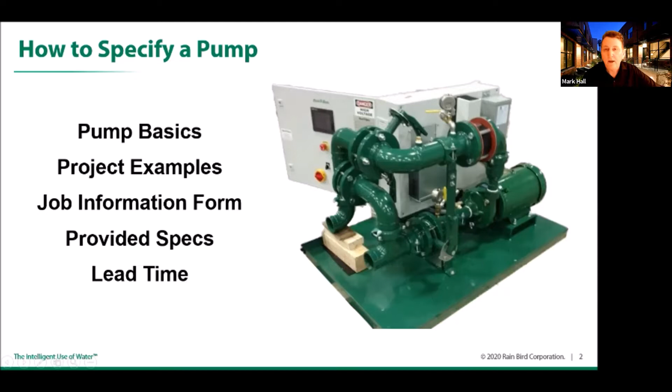So the things we're going to go over: how to specify a pump, pump basics, some different project examples, also our JIF form, or job information form. That's really the main thing we need to get you the pump specs. And then the specs that we actually provide, and then what the lead time is. So we'll go through that.

Now, on pump basics, and how does it work? Well, not everybody knows the pump components, and they don't really know how it works. So what we do many times is a pump tour, where we come to your office and bring a pump with us. But between COVID and everything else, Mike's nice enough to, I'm going to stop my share here and give it to him. And hopefully he's got a pump somewhere at his house that we can look at.

Yeah, absolutely. So, Mark, keep chatting. Give me 30 seconds. Let me walk down and go to the pump. I'll join you guys soon. That sounds good. We'll give you 25. Okay. He's been really good. I've had to turn him into like an actor. We did one just, we tried to do a video, and it actually came out really well. But like anything, those kind of things you've got to do a bunch of times to get them right. So you got the actor and film crew all in one there, huh? Yes. So anyway, he's been great, open to do this.

We've only done one of these before, and literally they said, we're going to go spec a pump. That doesn't usually happen. But it's still good to have the information. A lot of times you don't have this overall. You guys are so busy doing what you're doing. This will at least give you something. And then, like I said, when it comes to specing pumps, you just fill out a form, and if you have any questions, we're good to go.

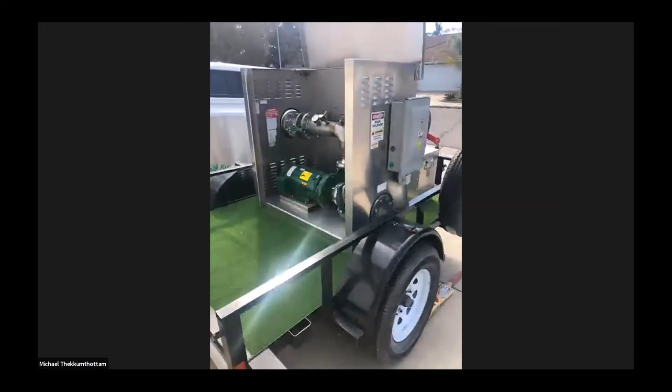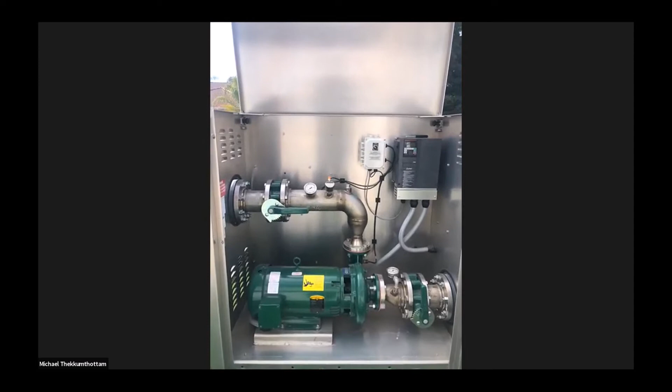So here it is. What you see right now is our CLP pump station, which is one of our super value engineered models. This one doesn't have all the bells and whistles, but this is the smallest pump station Rain Bird makes, which we could actually haul to the customer to demo and show the components. So I'm just going to go through the basic components; typically all the pump station components are the same.

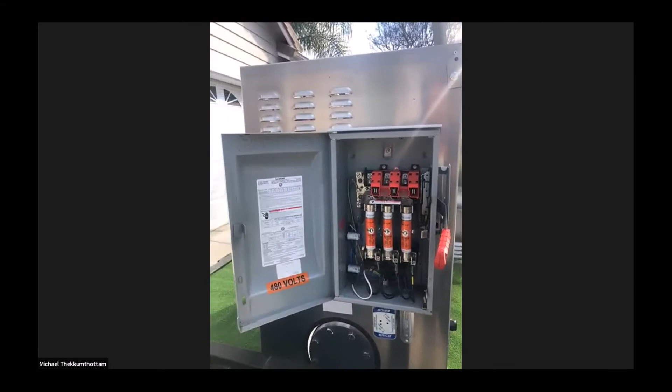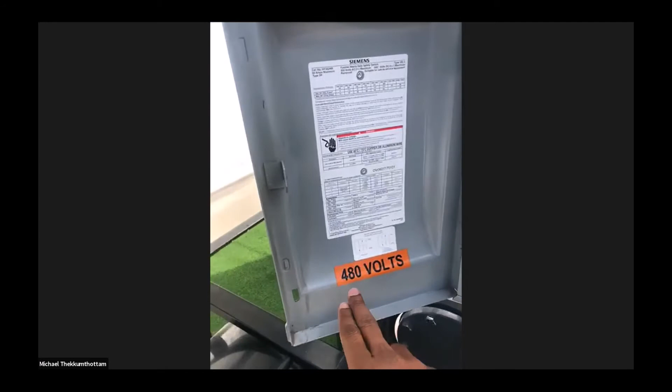So one of the most important components is the disconnect switch, where the main power comes in. Like you see, there are all the fuses here. It could be single phase or three phase. Currently this one was designed for 480 volt. In the next couple of slides of the presentation, you'll see the most important parameters we need to design a pump. Power is one of the main components we need to identify before we specify a pump. So this is the disconnect switch where the incoming power comes in at the site.

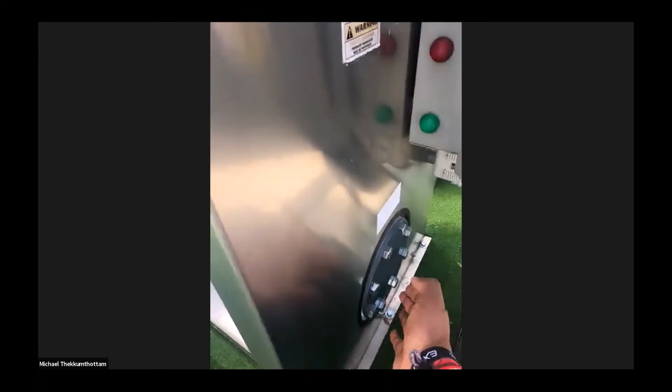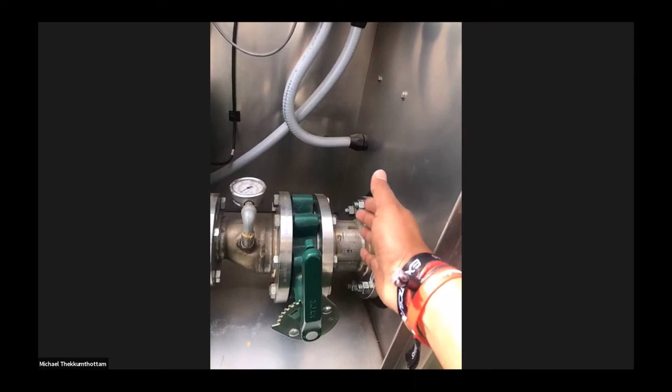Moving along, we have the inlet, which is flanged out here. This is the inlet of the pump where the actual water comes in. So it will be the water meter, then the backflow, then the pump station. After the backflow, the piping will come into the inlet of the pump. We do have an isolation valve for the inlet, as well as the discharge. The reason we have the isolation valves is to isolate the pump at a later time if some maintenance needs to be done on the pump itself. So you can isolate the system, take this pump out and do the repair.

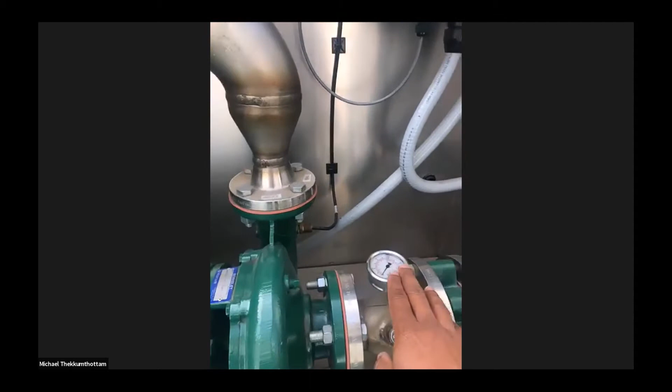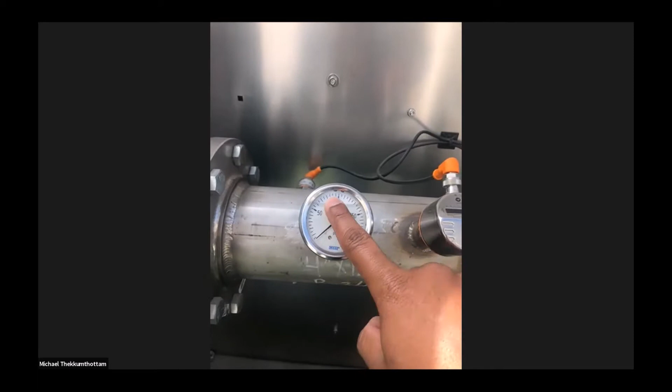The next component we see is the inlet pressure gauge. The inlet pressure gauge shows the incoming pressure, the pressure we see after the backflow. One of the most important reasons why we need a pump station is to increase the pressure. For example, if the pressure is 20, the pump boosts the pressure and discharges it. And here we have a discharge pressure gauge. When the pump is boosting, it shows the actual discharge pressure. So that's the inlet pressure gauge, and that's the discharge pressure gauge.

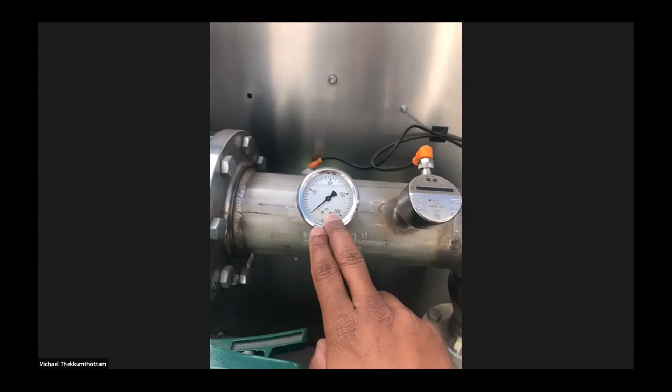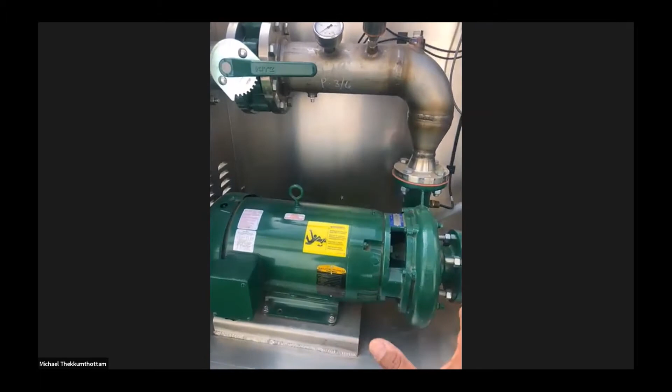Then we come to the most important part, or the heart of the pump station, the actual pump itself. So this green component you see right here, that is the actual pump. So here we have a horizontal end suction centrifugal pump. So it's mounted horizontally. It's actually suctioned from the end. So that's why I called it end suction.

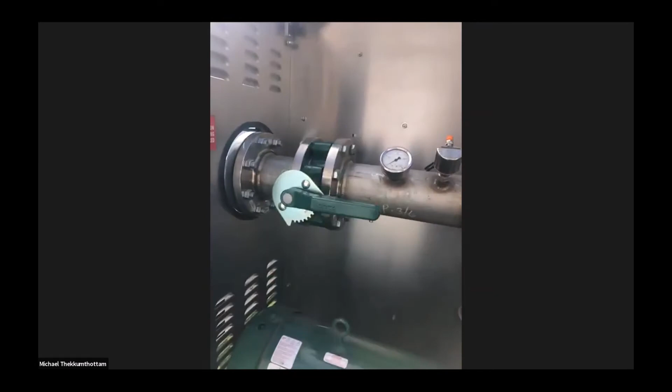And the discharge is going to the outlet. So water comes in, the pump rotates with the help of the motor and boosts the pressure and discharges to the outlet. So as you see, this is all the plumbing you have. You can also see some of the other components here.

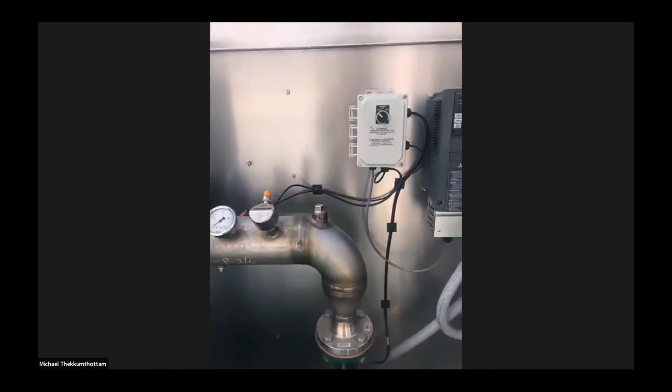So all the pump stations that Rain Bird makes are variable speed operated. So what you see here, this gray box, that's the actual variable frequency drive, or VFD. So the purpose of the VFD is to actually regulate the speed of the pump or the motor to push an accurate amount of water to each zone in the irrigation system.

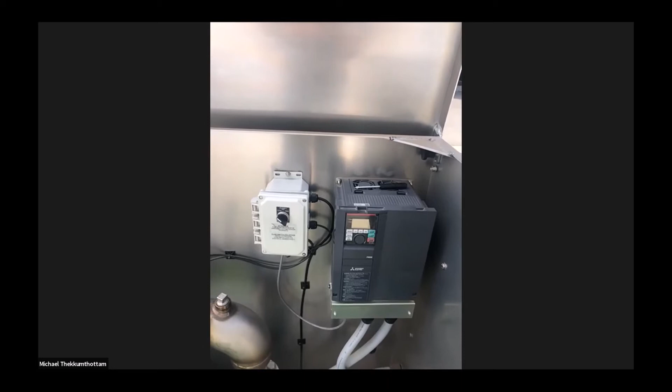When the valves come on, one valve or two valves, depending on the flow rate required for the zone, the VFD actually ramps up the speed of the motor to push more water or less water, and it will also help to keep the discharge pressure constant. That's what we want with the VFD pump. We should always get a constant discharge pressure, which will make the irrigation system work more efficiently.

Does anybody have any questions so far? Hey, Mike, I just wanted to ask, do we test every single pump that we put out? Yes, absolutely. So any pump which Rain Bird manufactures, we actually test it in our facility in Tucson.

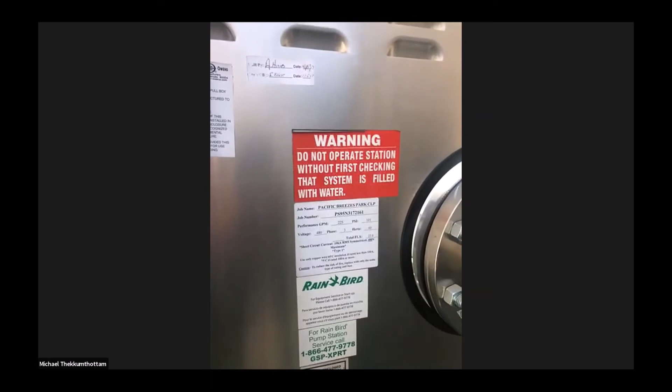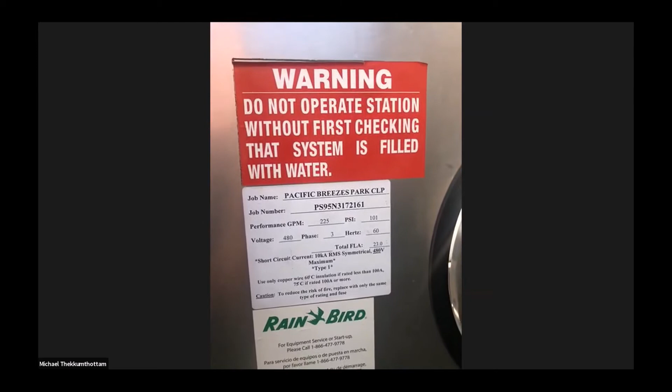So here you see, this is an actual nameplate of the pump station. It will have the job name, the serial number or the job number, and also the performance, like the gallons per minute, the set or design discharge pressure, voltage, and all those details. Also, you can see the Rain Bird pump station service call number. So this is a service which comes along with the purchase of the pump.

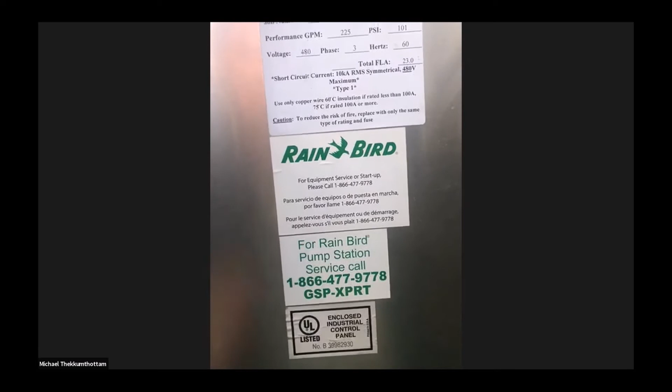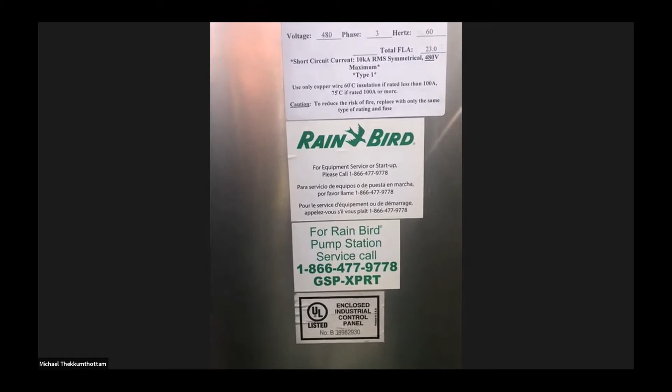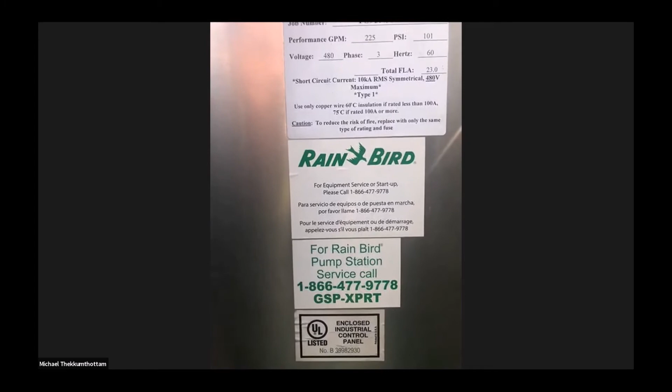It's a free service. It's a remote support line where a customer, if they have some issue with the pump at the site, could actually call this number, and we can remotely try to rectify the issues or any alarms coming on the pump screen. The reason we are confident to give this is because all these pumps are tested and we have all the test data at the factory.

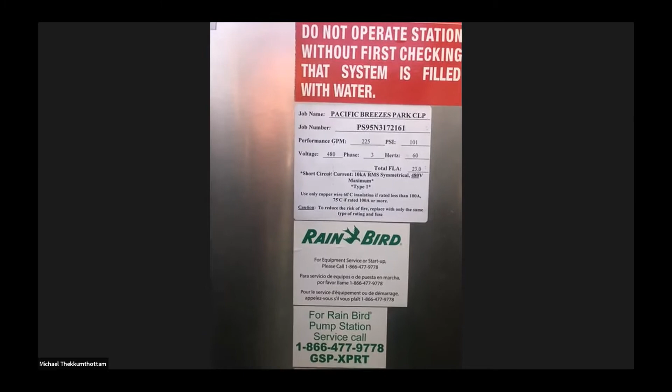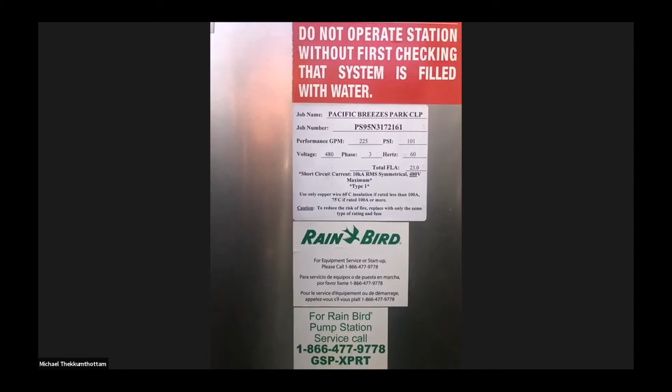So when you call this number and give this serial number, we can pull up all the data, and we know how the pump was tested, at what parameters, how it's supposed to work, and we'll be able to help the customer adjust some parameters and make it work for the system. Awesome.

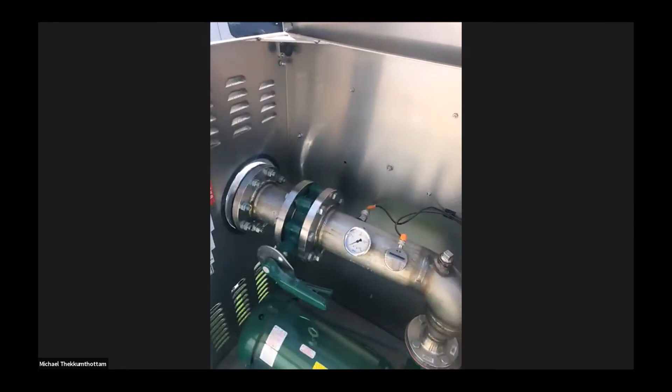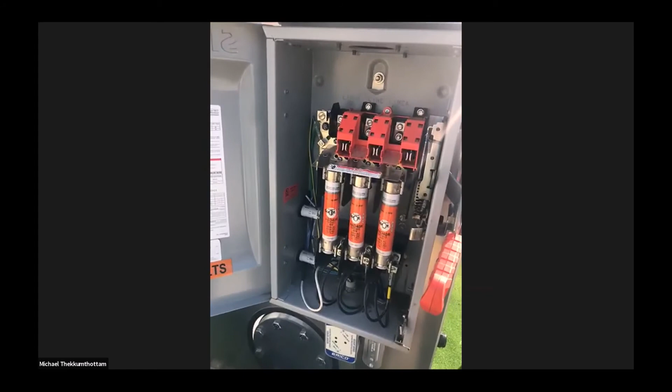Another main component. Go ahead. I have a little question. You said it could be either one phase or three phase on electricity. What's the difference between that? If you could explain the basics. Yeah, absolutely. So I'm going back to the actual disconnect switch. You see, this is actually equipped for three phase, but it's the power supply which is being allotted to the specific site.

So if it's single phase power, you will only have two lines coming in. Basically, single phase power takes more amperes or more electricity to operate a pump station compared to three phase power. Does that make it easier? Okay, so it just kind of depends on the power allotment that they get approved for from the city. Correct. Yes. So we can manufacture pump stations suitable for any phase, single phase or three phase.

When you are designing a system, you may not know because the project has not even started, right? Right. So how we do it is we recommend the architect assume a standard voltage and phase. For example, it's hardly seen, 480 volts; it's higher voltage. Mostly what we see is 230 volts or 208 volts. So we could put a 230 volt single phase. That's the most common on city developments or housing developments and stuff like that.

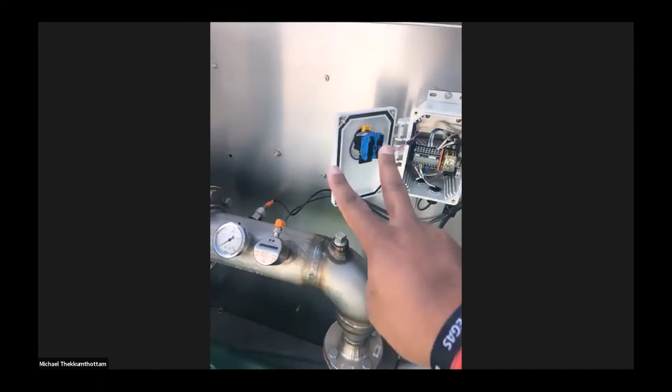Yeah, good question. And also, I think, Mike, the biggest thing, right, is if anybody can get three phase, it's just much more efficient. Correct. And the electrical costs go down. Yeah. So, when we go through the slides, I will explain it a little bit more, Brandon. And then I have one or two more components I just need to cover while we are here.

So there are a couple of ways we can start a pump station at a site. Does anybody have any thoughts on that? By flow sensing. Yep. Awesome. Any other? Pump start relay, maybe. Yeah. Okay. I know you know that part. Okay. So here is what you see.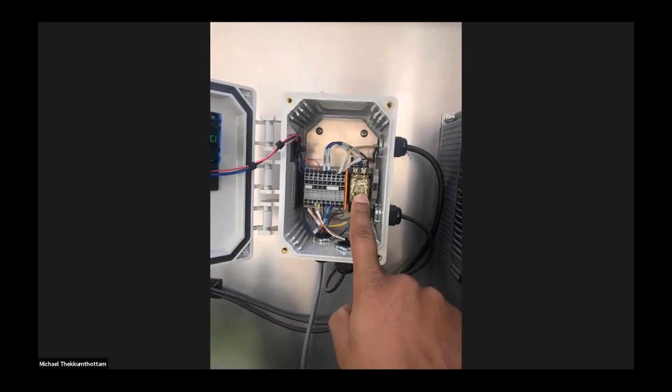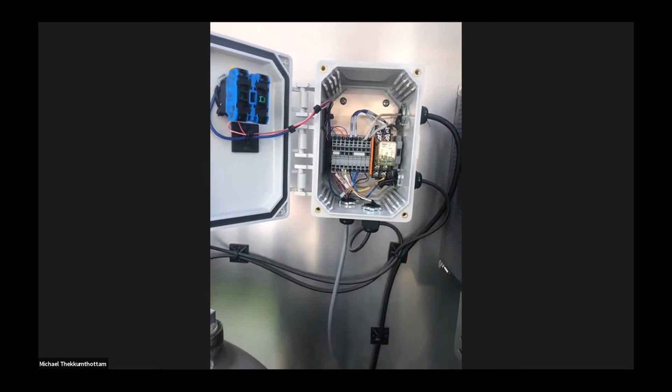So the CLP pump stations come with two options. One is the pump start relay. So this is the actual pump start relay, which you see here. So how it's connected is the irrigation controller, from the 24 volt signal, is actually connected to the pump start relay. So whenever the irrigation turns on, and if that zone needs a pump, the irrigation controller will send a signal to this pump start relay and tells the pump and the VFD to turn on.

So just to give you an idea what a pump start relay is, this is an actual pump start relay. It could be a bigger panel in our bigger platform, but the actual relay looks like this. Wow. So how does it determine whether or not it's going to need to turn on? Is that additional programming that needs to be done at the controller to state the amount of pressure needed, or does it sense that depending on the zone that's turned on?

So it depends. It's actually programming on the controller. Okay. So certain controllers, I mean, I don't think Rain Bird has that capability yet. We are coming up with options. I think that on the newer IVMs we can pick and choose which stations need the pump to turn on. So from the irrigation controller, it will send a signal to the pump start relay to turn on the pump for that station.

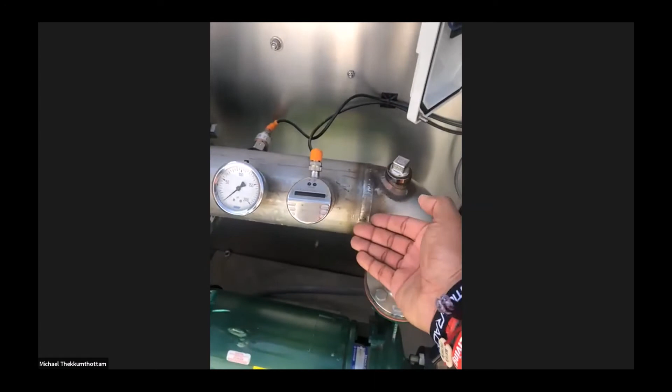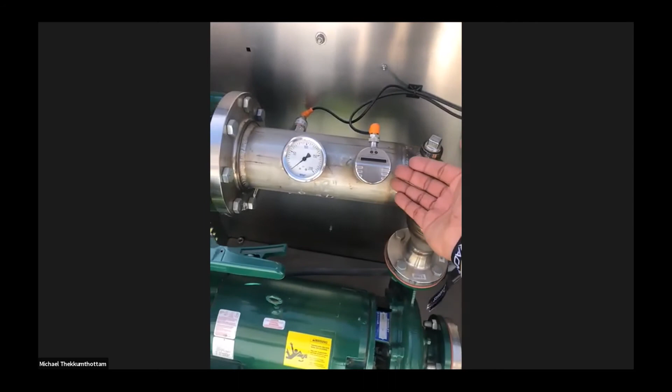Okay. The other, typically, what we do is a flow switch or a pressure start. So this CLP pump station has a flow switch or flow start kit option. So this is a flow sensor. What it does is when there is a flow through this pipe, this sensor senses the flow and tells the pump station and the VFD to turn on and start boosting. So basically, when the irrigation turns on, it actually senses the flow through the station. So that's a flow start.

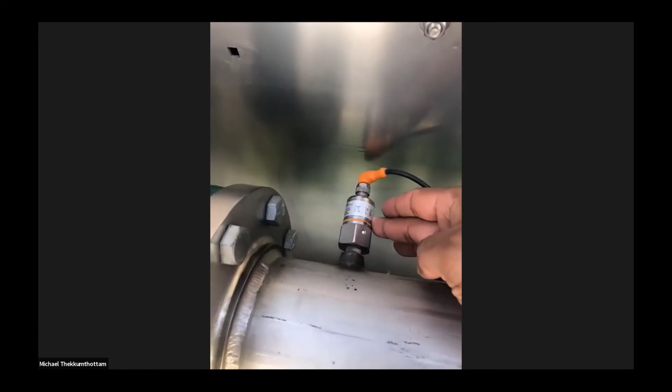There is another option also, which is called a pressure start. So it's similar to a flow start. Basically, instead of flow sensing, it senses the pressure. So here we have a pressure transducer, and it senses the discharge pressure. So when irrigation turns on, the mainline pressure goes low. The sensor senses it and tells the pump, hey, my pressure is going down, I need some boost, start the pump. So that's what the pressure start option is. Okay, yeah, go ahead.

Question. So since the motor is variable speed, what is it that makes sure that you're not producing too much pressure? Like, depending on the zone, if it's a zone that needs, say, 35 or 40, what makes sure that doesn't ramp up to like 50 or 60, or that you're overstressing the motor? Did that make sense, the question?

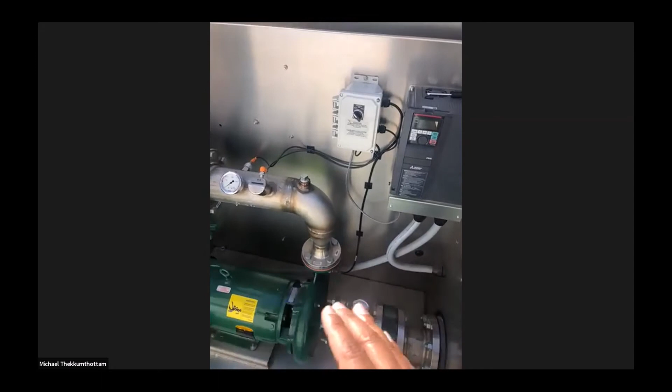So with the VFD pump, the VFD controls the speed and adjusts the flow. But in the VFD, we actually set a discharge pressure. For example, if it's 20 incoming, we set it at 70 or something like that, so that it's adequate pressure for the rotors. Okay, so that's set in the VFD? Correct. So whatever the flow rate is, depending on the zone, the VFD makes sure the pump station delivers the constant 70 psi or whatever the set design pressure is. So that's what the VFD is used for.

How it achieves it is by regulating the speed or RPM of the motor, how fast the pump is turning. So it regulates the flow rate, how much water it's pushing. And also, I think what you meant was, for example, if a system has drip zones and rotor zones, the drip zones may not need that boost pressure, but rotor zones need the boost pressure. Is that what you had in mind? Right. Yeah.

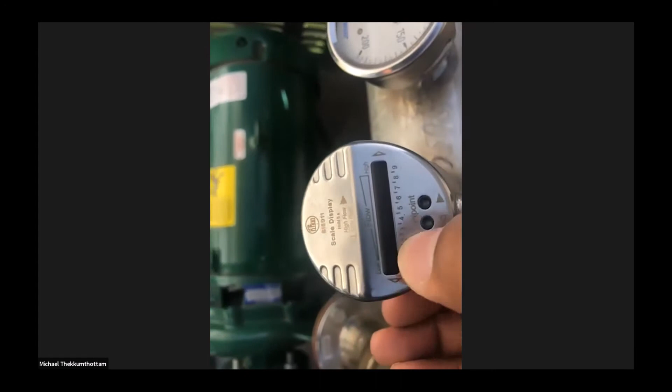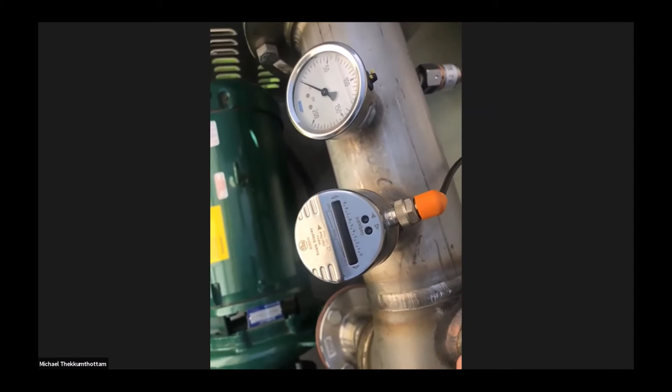Because I was thinking if the pump is set to operate by flow sensing, if a drip zone comes on and starts to flow, is that going to kick it to boost to maximum pressure that's set by the variable speed? It will. So one thing we could do is, I don't know if you can see this, there are some numbers here where you can actually set when the flow should start. Okay. So typically what we do is we know these small zones or the drip zones are low flow. So when we do the startup of the pump, we try to run the smallest zone when they need the pump to come on.

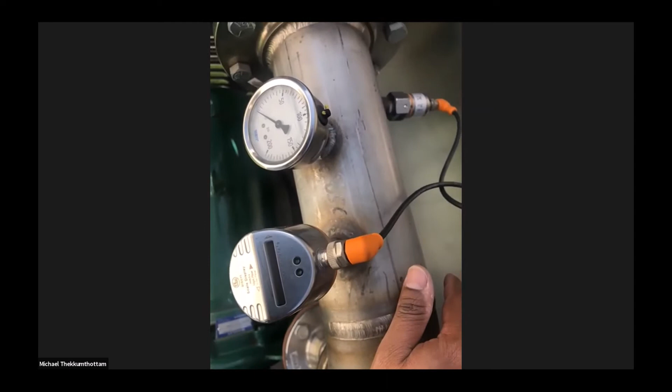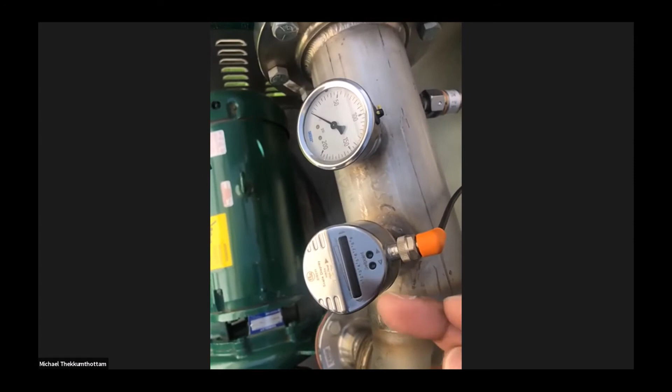For example, only the rotor zones come on. So we will start the smallest rotor zone and set this flow switch to only trigger the pump to come on when it sees that much flow. Okay, that makes sense. So below that flow rate, the pump will not turn on. Only when it hits, for example, 20 GPM or something, that's when the pump starts turning on and then starts boosting the pressure. Until then, they actually work with the available inlet pressure.

Hey, Mike, with drip and rotors, like you guys have been talking about, is it advantageous at all, even with the VFD, to stack, let's say, 4 drip zones together just to get a higher flow, or no? It is. So the other option is we could include pressure regulation at the drip zones, so that we don't overpressurize those zones. Yeah, go ahead, Brandon. Yeah, and that's definitely something we usually, I mean, it's standard for our drip zones, we include a pressure regulator.

Yeah, that's the best way to do it, because the VFD, once it's set at that discharge pressure, will always try to keep the system at that set pressure, and that's the actual goal of the VFD: to regulate the flow and keep that pressure constant. And what Mark mentioned earlier was because, for example, the pump station, we'll cover it in the coming slides also, each pump has a minimum capacity and a maximum capacity, even if we use a VFD.

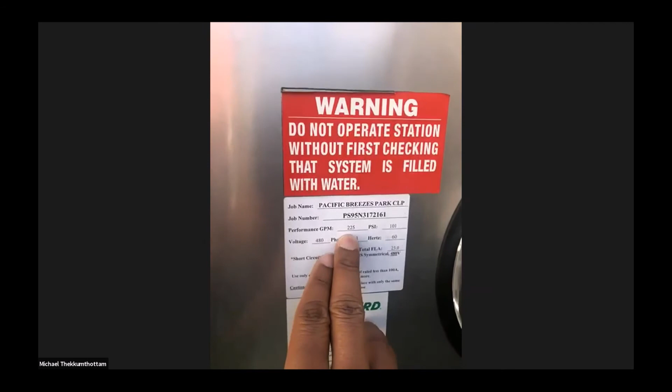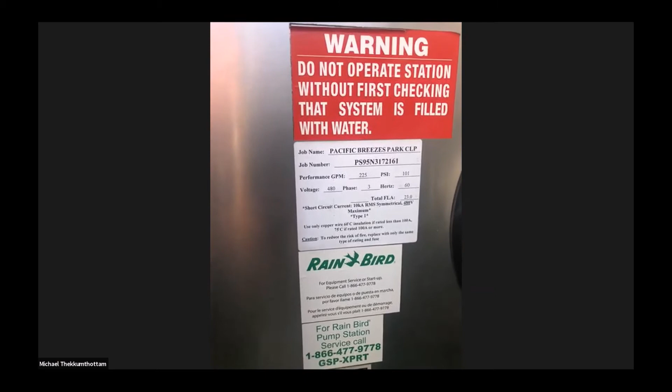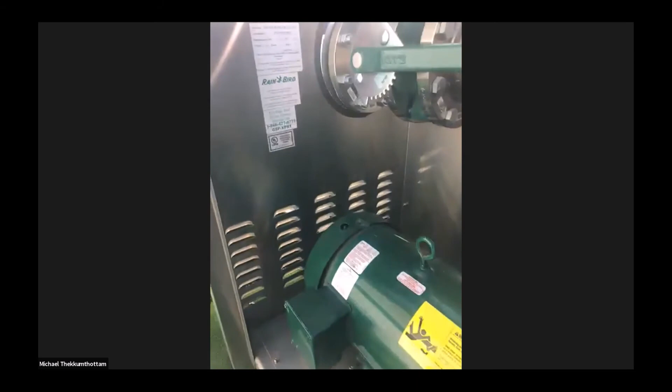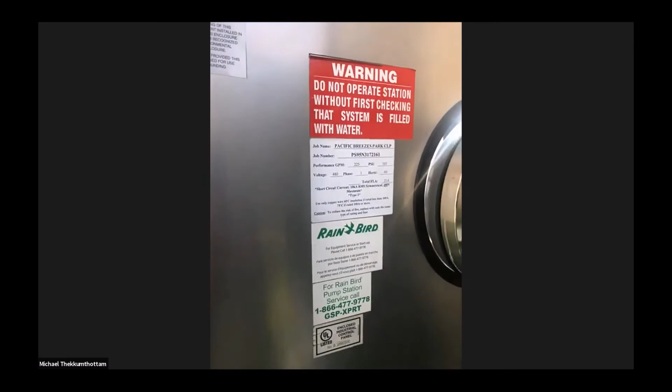For example, this one here is designed for 225 gallons per minute max flow. So that's the maximum flow that pump station can achieve. But the minimum flow will be around 90 gallons per minute because of how the impeller of the pump is. In the casing there is an impeller, and the trim of the impeller determines the maximum capacity of the pump station. Some people think if we have a VFD, the pump could cover from 225 GPM to 5 GPM or something like that, but it's not true. Every pump has a critical speed. We don't recommend operating the pump below the critical speed, half of the maximum RPM.

So that's why Mark was saying, in sites where there are smaller drip zones and larger rotor zones, if we need to make the pump work efficiently, the best thing is to stack the stations and bring that minimum flow higher so that the pump will not trip and not give any alarms. Otherwise, when the pump is running below its capable low flow, the pump thinks it's not getting enough water, and it shuts off. It's a safety alarm so that the pump or the motor doesn't run off and burn down. So that's a low flow alarm. It'll kick on.

Very good. Okay. You want to move on to the slides? Okay, I'll join you guys in 30 seconds. Yes. All right. See you.

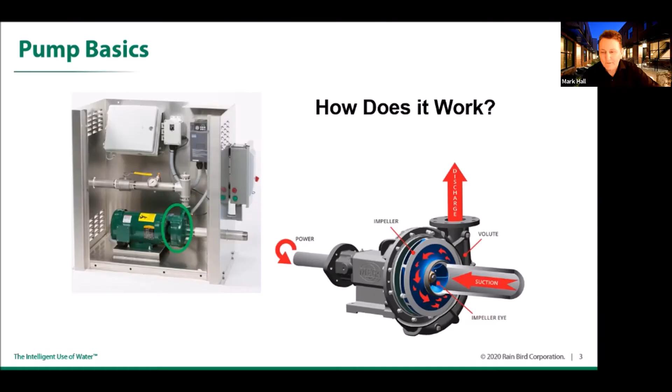All right, we'll probably move through these fairly quickly, but it's really helpful, at least for me, when Mike walks through the actual pump, because so many times we're just looking at the specs and not at all the nitty gritty. Yeah, I really enjoyed that. You get to see all the different angles instead of just what the cameraman took and what pictures are on the internet. Yeah, exactly. This will be good though, a good follow-up. You guys can see that okay?

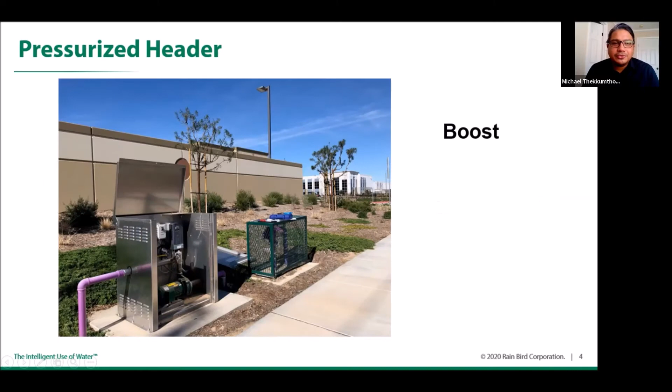So the above ground tank, Mike will go into that. We've got several different conditions. Most of your jobs will be standard, but every now and then there may be some different types, and this is one of them. Yeah, so what we are seeing right now is different types of application. The first slide which we saw is basically the boost application, where city pressure is coming in, and after the backflow, we are putting a booster pump to boost the pressure for the irrigation system.

The next slide, I've seen a lot of this kind of system. It's an air gap tank system, or we call it a flood suction, because we store the water in that tank and pull the water from the tank for the irrigation. So the pressure available will be approximately 2 psi inlet, and for the irrigation, typically it will need approximately 70 or 80, depending on the site, if there is so much elevation.

I've seen a lot of this in the San Jose area. Even if their city water has enough pressure, they actually use this air gap tank. And I've been trying to tell the city that that's actually not a super efficient way, because if you already have approximately 40 psi, when you push that water into a tank, you're dropping it down to 2 psi or 5 psi, and then we have to again use a bigger pump to boost that pressure back up.

So instead of doing an air gap tank in those areas, they could basically put in a backflow and then connect it to the booster pump right after that. But it's just their way of doing stuff, so we don't have much say yet. Yeah, that's interesting, because that whole tank would cost a lot more than just a backflow and connecting it to the pump. Yeah, that's right. Sorry, this is Janet. I'm sorry I was late, but we get a lot of that in different cities where they want these air gap tanks, and it's such a waste of money to me, because really, you could do the same thing with a backflow preventer, way cheaper.

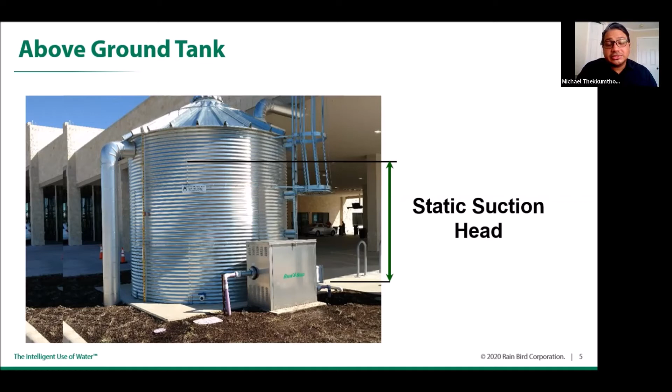Have you guys seen a lot of rainwater harvesting systems up there? Yeah, actually, San Francisco now has, I think, a mandate where any new buildings have to have rainwater catchment. Awesome. Yeah, Rain Bird has a system, and I've seen it a lot in the LA area. We get lots of requests, and Mark and I can share a typical system, but mostly the maximum flow for that system is designed around 25 gallons per minute. Oh yeah, we do drip mostly. Exactly. And we'll have a mini self-cleaning filter system in there, because it's harvested rainwater, so we want to make sure the drip line is protected. It's a mini incorporated package system, which is pretty value engineered as well. Yeah, I'd love to see the literature on that.

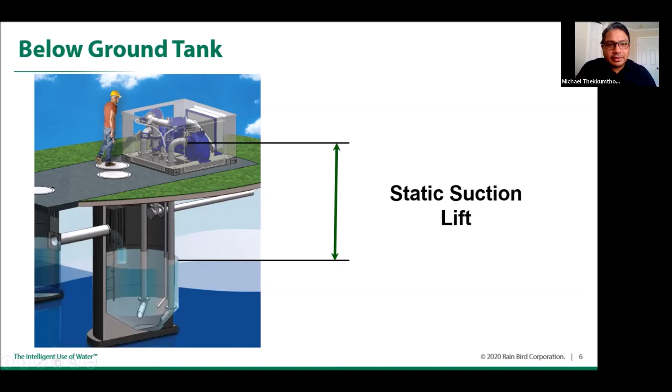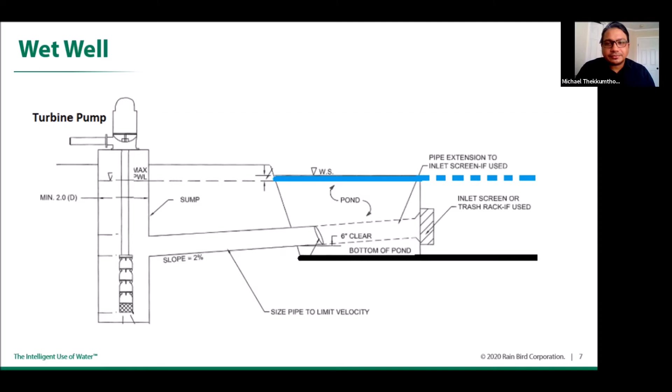What we're talking about is like 1,000 gallons per minute, 1,500 gallons per minute. And lots of times golf courses also use these kinds of systems. And these are a couple of $100,000 worth pump stations. So we have the capacity to do that too. To do 5 of those? Every year.

We've run into it a couple times, but not very often in our landscaping. We did, I think, a cemetery once that had a lake. Awesome. Yeah, Jen, in 2019, we did the Riverside National Cemetery, the newer phase 5. And now we're working with the cemetery to upgrade 2 of the older sites, which had older pump stations. So we're proposing a new pump station.

We're working with a design engineering company up north called VTI. They're the ones designing the retrofit, and we are supporting them with the pump station. So please keep us in mind if you have opportunities like that. We'll definitely be able to help you out.

Moving on, another scenario which we see is also a suction lift type station. We've done a couple of these in Northern California, Auburn area, where there was a regional park. They used to have a wet well type system, but it was 30 years old, and the park district didn't have money to build a new wet well system. So we proposed a suction lift, where a pump can stay on the bank of the lake, and we are pulling the water from the lake and using it for irrigation.

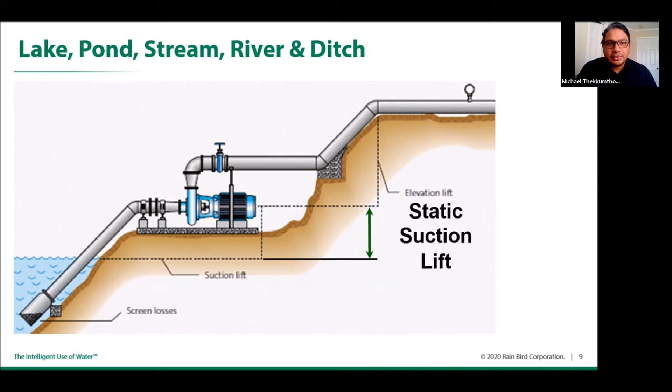They used intake screens to filter the water coming from the pond to the pump. And we also used a secondary filter downstream of the pump to clean the water before it's pushed to the irrigation main line. All right, Mike, if you let me, I'll cover the flow range. How's that? Okay.

I think we've already talked about this a little bit when Mike was going through the actual pump, but things to keep in mind. These are items that we ask on our job information form, and they're critical to sizing the pump correctly. So we've got to know the minimum flow. So if you've got drip zones, maybe you're going to stack those where you're doing 2 or 3 or 4 drip zones at a time.

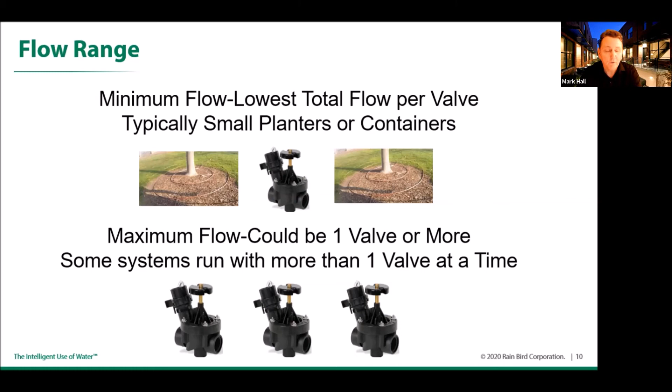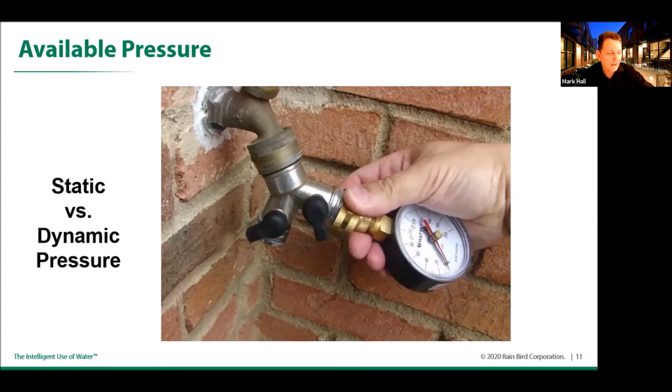Then we also need to know the maximum flow when you've got all those rotors going, or whatever the combination is, but we need to have that parameter. Otherwise we can't size it correctly. So the flow range is super important. Mike's also going to talk a little bit about the available pressure. We all know a lot of the basics. So static versus dynamic pressure.

Yeah, so static pressure is the pressure available when there's no water moving. The dynamic pressure is the pressure when the water is moving in the irrigation system. Dynamic pressure will always be lower than static pressure because in dynamic pressure we are considering the elevation losses, the bends, the friction losses through the pipes and all this stuff.

So when you are designing a system, it's hard to know the dynamic pressure, but the way we figure it out is using the critical loss calculations, which you do. On that, you list out the backflow losses, elevation losses, friction losses and stuff like that. Yeah, the last 2 months we've been going through that pretty hardcore here, making sure we know how to do those and hammering that into their head. It's really important. And one thing we need is to know how much pressure we need to boost.

Dynamic pressure is mostly important when we are retrofitting a system, an older pump station, or a site where they didn't have a pump and now they would like one. Typically school districts, which may not have needed a pump 15 years ago, but now the pressure has gone down, so now they need a pump.

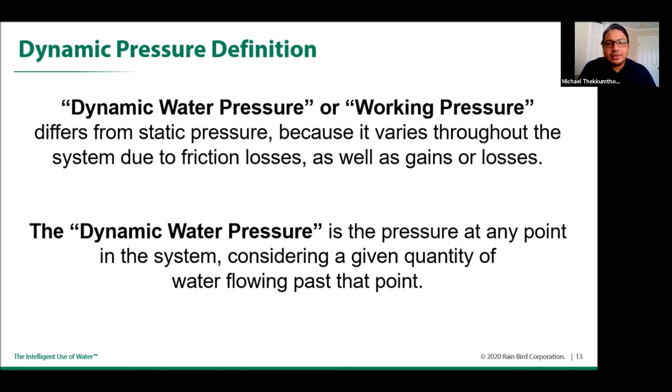So I go to a site and check the static pressure after the backflow when there's no irrigation running, then check the dynamic pressure when the irrigation is running. You'll definitely see it go down at least 5 to 10 psi. Quite a bit. All right.

Yeah, so typically if we supply pump stations for military sites or Air Force sites, they have their own camouflage color or different custom paints they want. So they would request special painting. We did the Riverside National Cemetery pump station. It's a completely purple pump station, standing in the middle of a beautiful landscape, because it's recycled water they're using. They wanted it. So if the customer wants it, we can customize it whatever way they want. We have the capability. So, Mark, could you please go back again?

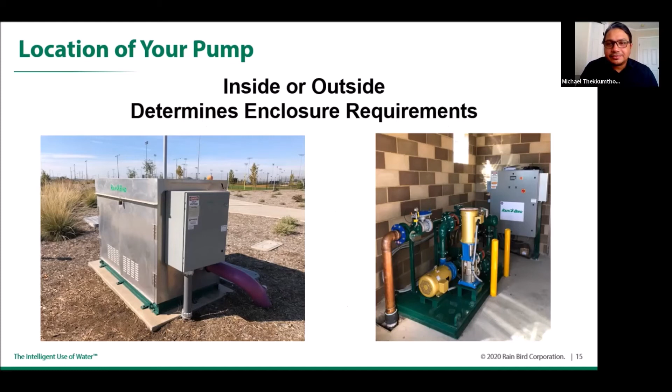We could recommend to the customer, hey, this is 7.5 horsepower or 10 horsepower and above. If possible, we can go with a higher voltage, like 480 volt or 460 volt, or a three-phase power supply, so that their operational cost through the coming years is less compared to using single phase. What is the standard range of horsepower for the pumps you guys produce?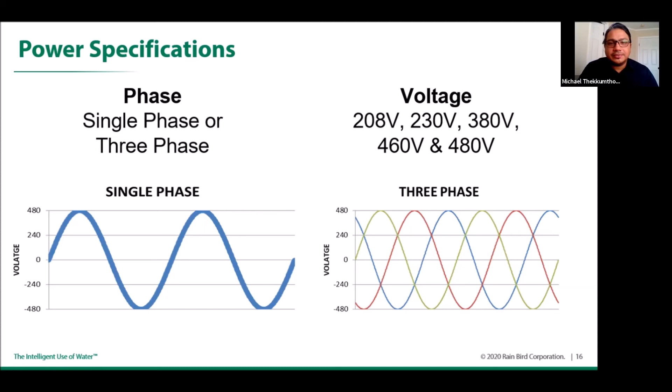Yeah. So the lake pumps, which we saw earlier, are about 100 horsepower, those are massive. Those ones are 460 volt or 480 volt three-phase, because we want to reduce the operational cost of the pump station. Yeah, that makes sense.

All right, it looks like a lot of boxes, but this is our job information form, or JIF form. We'll send you guys an Excel spreadsheet. It's actually really simple. It's got these 4 steps and it's just making selections. You send that back to me or to Mike. We work together on that, and then he'll come up with the actual pump spec, the details, everything that you need. And if anything changes along the way over the next few months, which happens all the time, or there's a new higher GPM, he'll make those adjustments. And then we record that.

Now we also have this online. I sort of prefer the Excel spreadsheet myself because then we know what's going on. Online, we do know what's going on, but it is another option where you could literally go on the website, put the numbers in, and they'll put out a quote for you. But I'm sort of old school on that. I'd rather go with Mike and see a person. So that's just me.

Mark, I just wanted to add something really quick. Yes, sir. We've been in the market for so long, and in the market Rain Bird has very expensive pump stations compared to other manufacturers. When I started with Rain Bird 3 years ago, that was the talk in the market. The reason is the job information form which you saw. We would definitely hold hands with you on this, because sometimes some designers just tick every box, and then we basically quote a pump including all those.

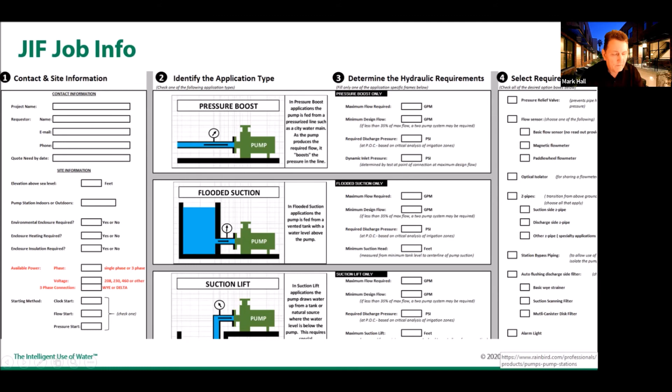So these are the specs that we provide, and the cut sheets for your plans. This is the cut sheet. The pump tech spec is a little bit more standard, but this will have all the other information on there, so you can just put it right on your plan. You don't even need a sticky back, if you know what that is.

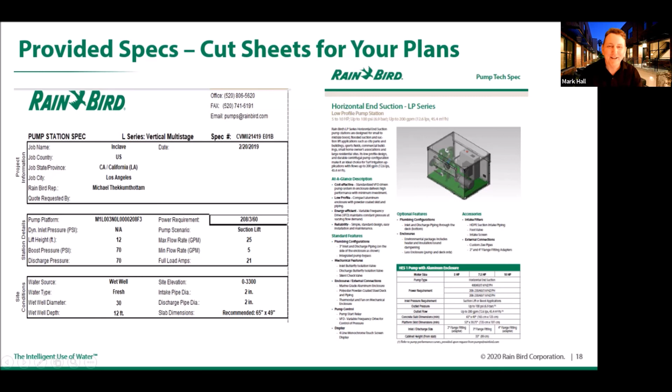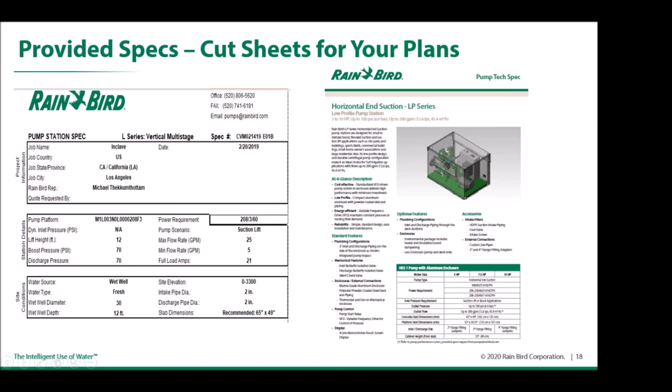Somebody does. I do. I always think of sticky backs when I see these, like cut sheets and stuff. I'm like, yeah, sticky back. No, we just paste them in on CAD now. Yeah. How about that? Thank you. Do you have details too, or never mind.

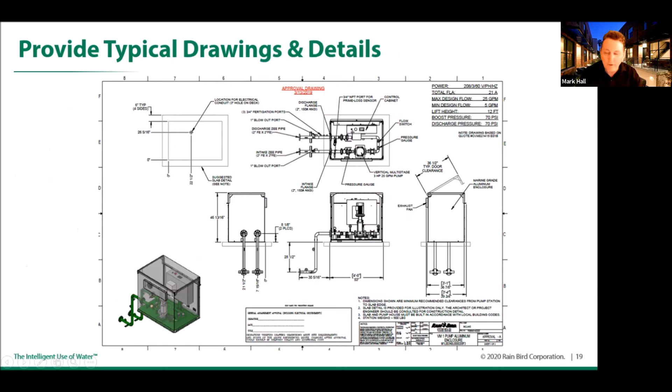Yep. Definitely. These are just some more of the drawings. Mike, I'm going to keep moving only because we're getting on the hour here. So here's the turnaround time, it's really fast. Sometimes it's faster than even what I have on here. Mike, I know he works late at night. Sometimes we both do. Last night, I think we were doing a pump spec until about 10:30 or 11. So it wasn't that it was even a rush. We just want to make sure that we get them done.

So you can see the different platforms. If you do something like a custom platform and a much larger pump, it may take us 72 hours to turn it around. And now at Rain Bird, we have quite a facility for the pumps if you guys haven't seen it. And of course, it's going to be a while before we can have fly-ins again. But it's impressive, and we can get things done very quickly. So 3 to 6 weeks for a small platform, and then 6 to 12 for large.

So I think that's another reason, Mike, when you're talking about the cost. And Janet, I was going to tell you that it's been interesting because just in the couple of years I've been up here with Mike, where we've gone through and done this and talked about job information forms, people have done comparisons. I think they like the fact of us getting back to them with the right information and following through. But I know we have to be competitively priced. So I think we've already turned at least 6, 7 firms to 100% Rain Bird on the pumps. And I think the cost is part of it.

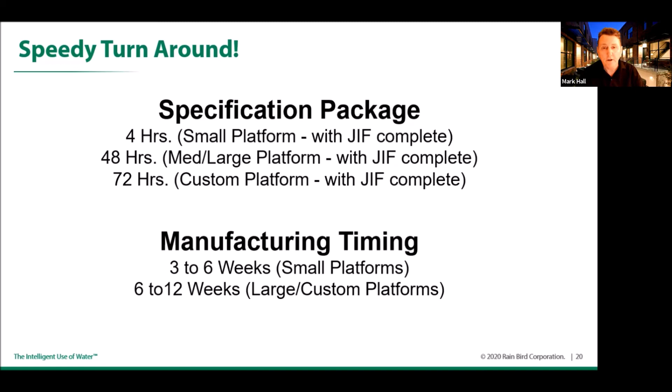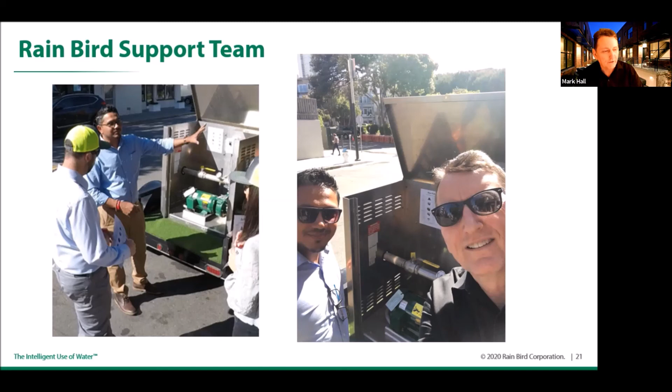So this is our support team. You can already see us. When we get to go on a road show, we can actually get out there, but this worked out great. I think Mike knows how to do this, and he's my guru. So this is in San Francisco, when you used to be able to go to San Francisco. So I said, ask Mike T. It's easy to remember.

The last thing, only if you guys have time, it'll take about a minute, 2 minutes. Our catalog. Well, first, are there any other questions on pumps while I've got Mike? Yeah, thank you, Mike. That was really, really informative. I appreciate your time. Thank you all for giving us the opportunity. I know we've been trying for some time, and I know you all are busy, but I really appreciate you guys' time too.

Cool. Thank you. So what I was going to show you is we're not doing a catalog this year, which I wasn't too happy with at first. And then I'm like, so what are we going to do instead? A lot of times Rain Bird's done this before, and then we end up doing something on our website, or say, hey, go to the web, or even at one time they did a CD that didn't go over. But now we've got the new Rain Bird app resources, and I'll tell you the advantages. And I know because I'm big on catalogs. I gave out 400 last year.

I think to you guys probably 5 or 6. So this goes up like this, and what I like about this is it's up to date. Every day we update, whether it's new products or whatever. Where you get a paper catalog, it's out of date with Rain Bird at least within 15 to 30 days. So I've already had 2 new products since I got this app just a few weeks ago. So you can literally go to catalog.

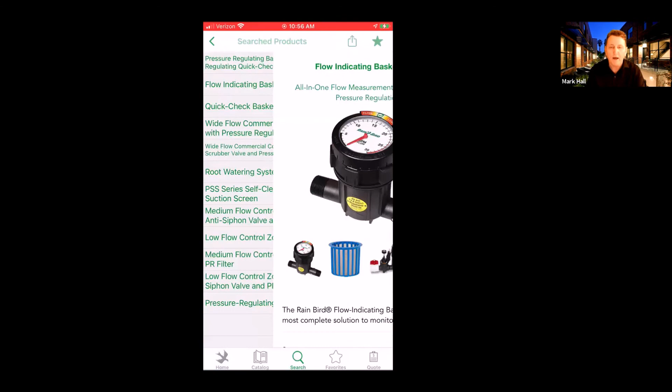And the other thing too is the search. I haven't liked our search engines before, and we've definitely improved it on the website, but also on this, so you can switch back and forth. Like if I couldn't remember the name of that product, I could go basket, and that's all I remember. So I do the search on that, and it's going to bring up anything with baskets. So now we're back to flow indicating basket filter. So that's about it on that, unless you guys have any questions.

Is that accessible online as well, or only on the cell phone? No, not online. But you'll find we're making the website actually match the app, back and forth on that. In fact, this will come eventually, but we're going to do some kind of a quote feature. So you can literally just pick 3 or 4 products and it'll give you the price, which is nice. There's a price list on here too.

So Brandon, you can probably load the app on your PC, right? Yeah, you could. I haven't done it, so maybe I should try that. So, yeah, you guys can do the next one of these. Show me that app on there.

But yeah, if you can do that, I just share this on the Zoom so you can see it on your phone, because when I started playing with it, I tried my catalog and then I tried this, and on my timing, I'm probably at least 10 times faster because we have so many products. So it may not work for everybody, but I think it'll do fine once you're used to it. I like the catalog. Great.